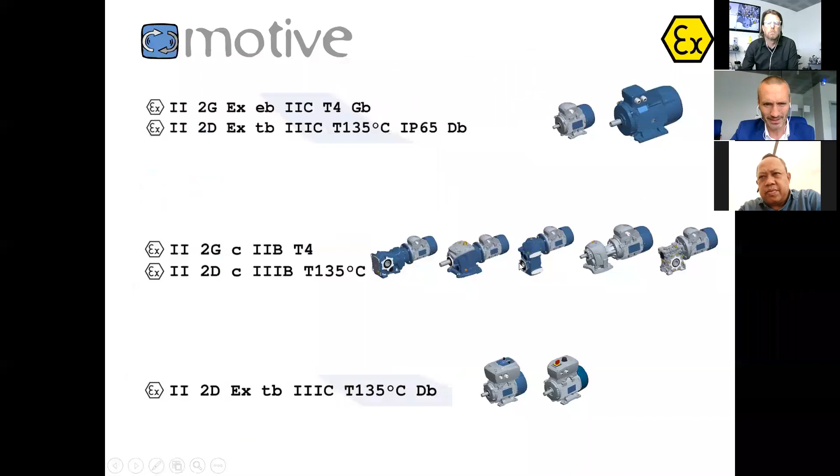Whoever it is, I'm going to ask him to, my God, deactivate. Did I get it? Yes, I got the right one. Okay.

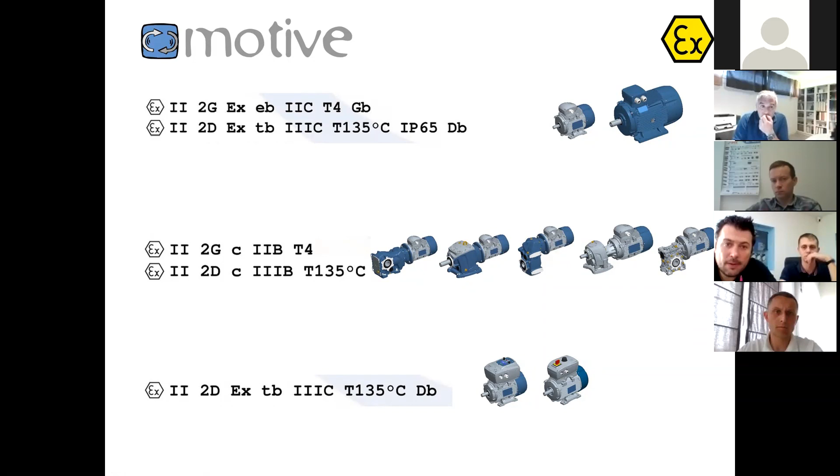These nomenclatures are what we are going to understand. If you understand this, you understand how to order. You also understand what is the right thing to be installed in a place and what to say to your clients. And we are going to use the main example, the motors.

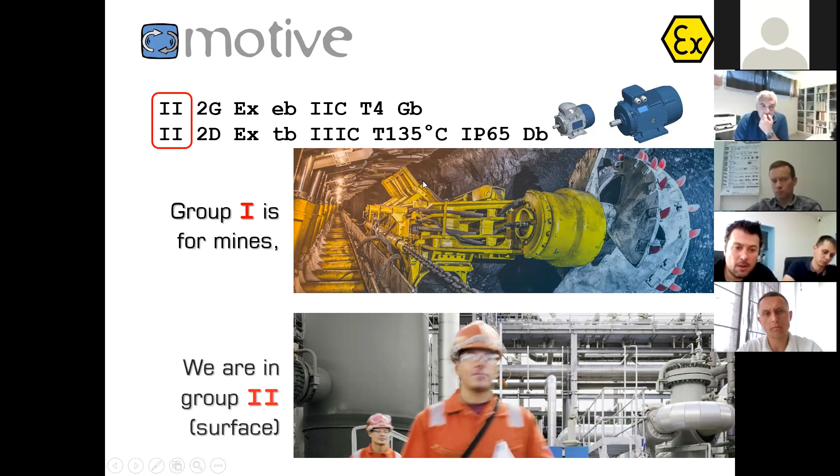Now you can see that at the beginning of what you find in the nameplate or in the certification, you find this II. There may be only one I or two I. The difference is that II is for surface industry. I is for underground, so typically the mines. But if it is a mine in surface, it's II, okay? The two things, I and II, take two different kinds of classifications of the risk.

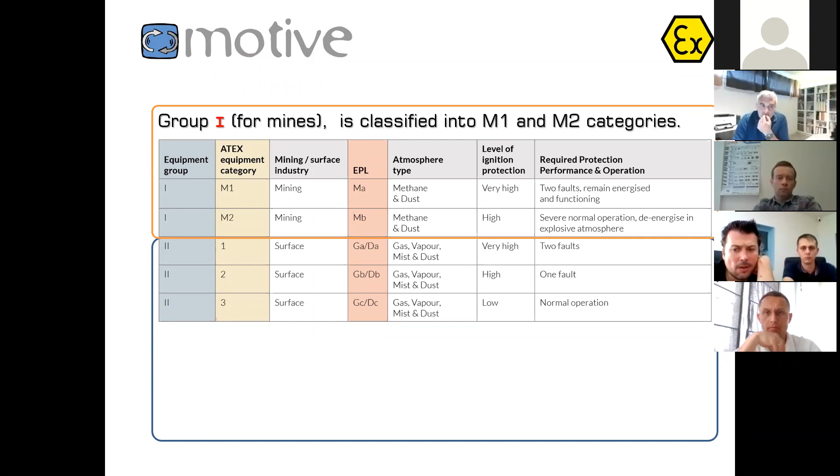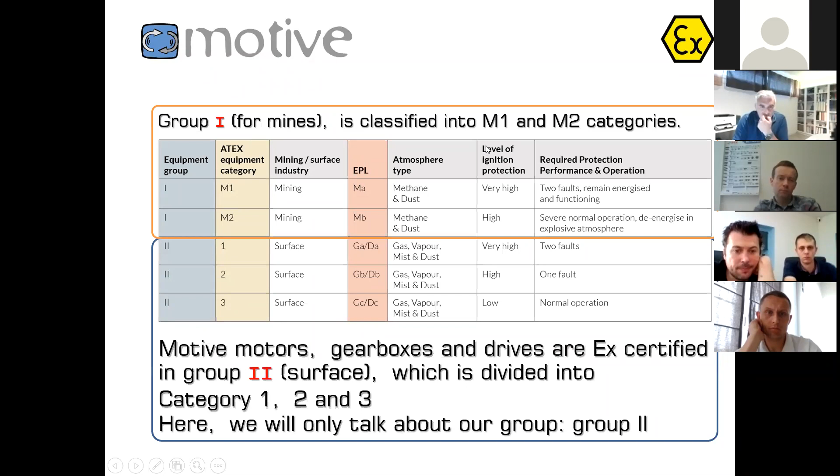Different categories, okay? Now we are only in II, which is 90% of the market, and we are going to talk only about the categories of II, which are category 1, 2, and 3. By examples, I will show you what it means. And in fact, here we write another number, 2, which means category 2. There are 3 categories. 3 is low risk, 2 is high risk, 1 is very high risk. And I'm going to tell you by example what it means.

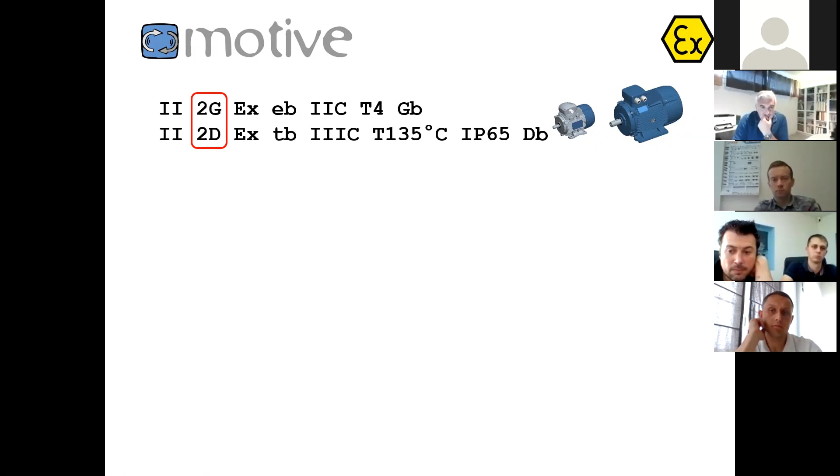Then there are 2 letters, G and D. G is for gas, and D is for dust.

Come on, PowerPoint, go on. Okay.

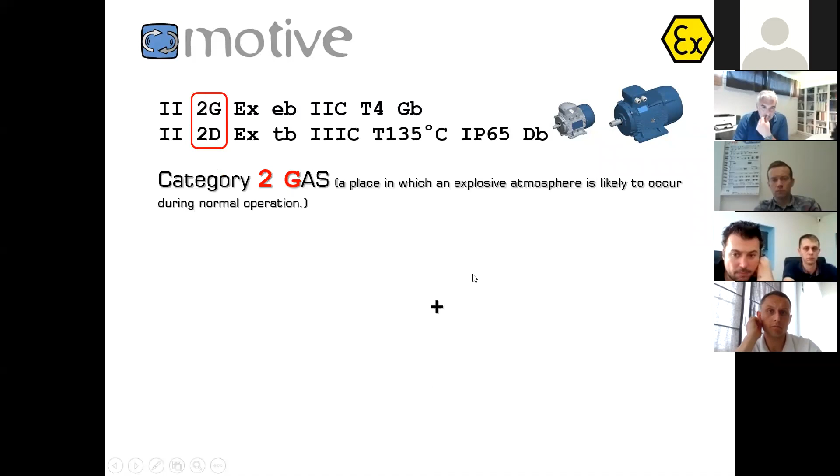Some people like to talk about zones, okay? They don't tell you category and dust or gas. They tell you zone. But zone is not written in the nameplate, it's not written in the certification. There is a client, Jordi knows this very well, he's listening to us, who wants the zones to be written in the nameplate. But we can write in the nameplate only the nameplate data that the certification body asked us to put. Okay, also the nameplate has been certified and we cannot play with it.

So for this client of Jordi, we had to add a further nameplate. But by the way, this further nameplate is useless because if we say 2 gas, we are talking about zone 1 and 2. If we say 2 dust, we're talking about zone 21 and zone 22. Why 1 and 2? Because category 1 is the highest risk. Category 2 is high risk too, but a little bit lower. And category 3 is low risk.

Now, zone 2 is category 3 gas. Zone 1 is category 2 gas. Zone 0, we don't have it, is category 1 gas. Okay, at Motive, we don't have category 1. But we'll see that this is useless because no one would put a motor in a category 1 place. 21 means category 2 dust. Zone 22 means category 3 dust.

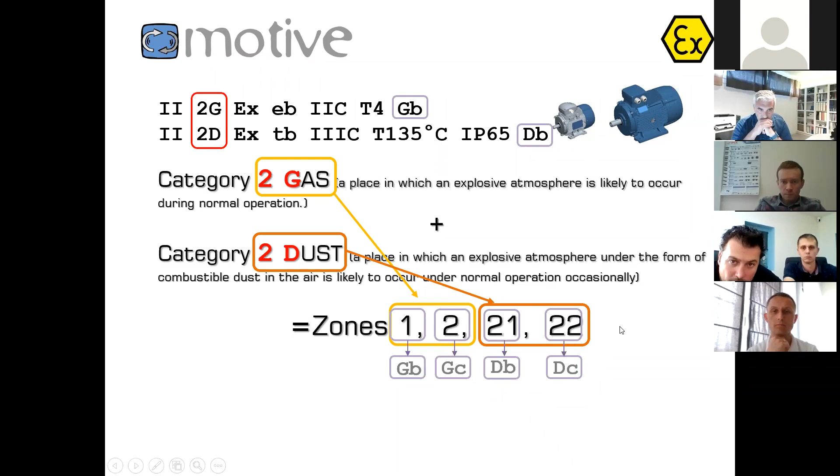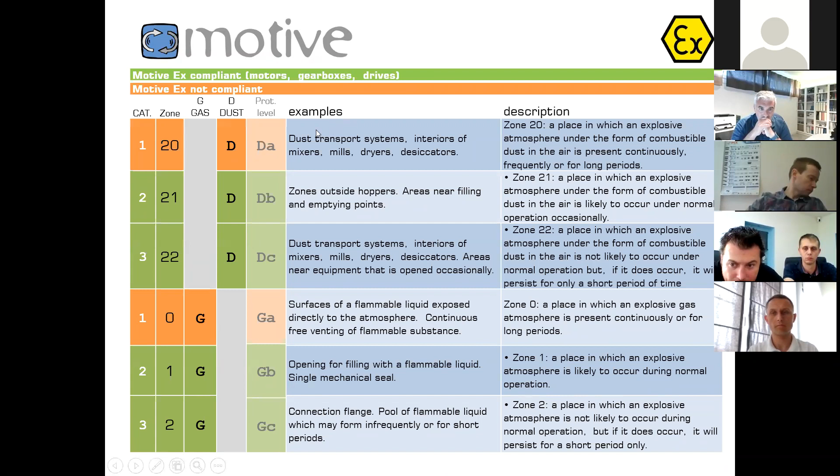I'm not going to bore you further or confuse you further, but this table chart is summarizing what I just told you. Okay, so if you want to go back, you will read it in the slides that I'm going to give you after the webinar. These are also examples of what is category 1 or 2 or 3, but the best examples are given by these pictures. Now, you can see zone 0 is category 1, zone 1 is category 2, zone 2 is category 3. Zone 2 is where they tell you, please don't smoke around your car, okay?

Maybe you did it, and luckily nothing exploded. The fact is that the risk is there, but it's not high. Category 2 is where the gas passes through the pump, but it doesn't remain there forever. Zone 0 or category 1 is where the fuel remains. Would you put a motor inside the fuel? No. Okay, that is why I told you that we are covering everything, because we couldn't make a motor for category 1, for zone 0. No one would put a motor inside the fuel.

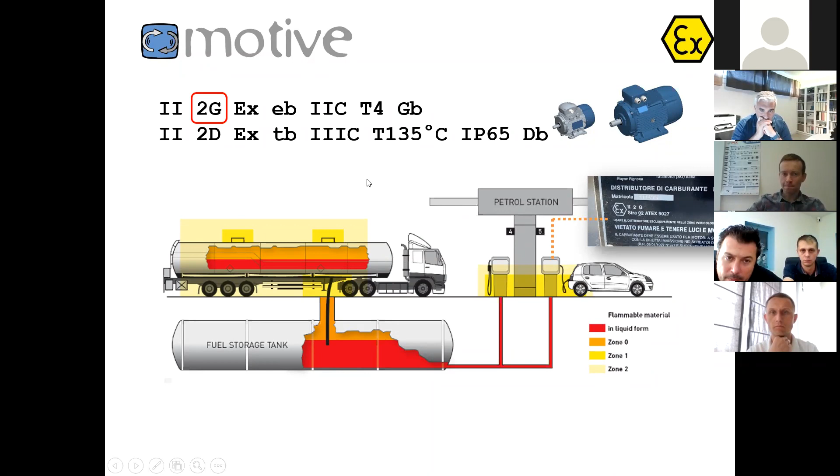So the tank is zone 0, the pump is zone 1 or category 2. And in fact, if you look at the pump in the gas station, you will see that it's category 2 gas. Okay, this is a photo I took myself. Dust, it's the same matter. Inside the silos, inside the tank, where the dust remains is zone 20 or category 1. Where the dust passes through is zone 21, which is category 2. All around where the worker is working is category 3, like zone 22.

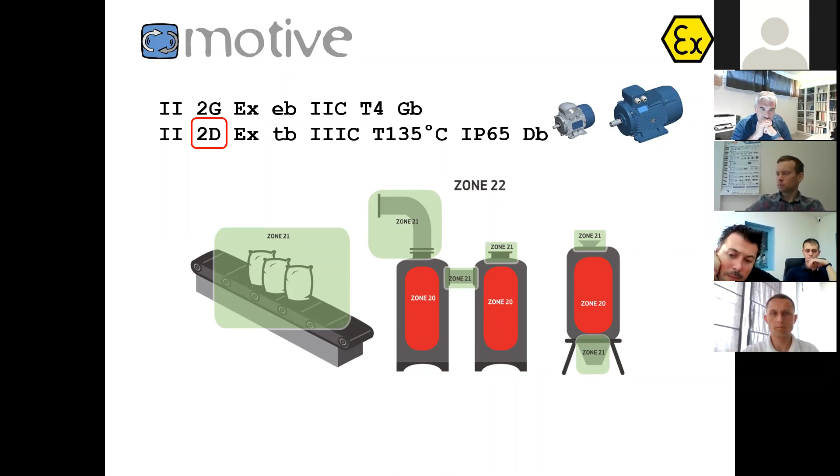You can understand by this how different category 3 is from category 2. In fact, with category 3, the certification is not mandatory. A manufacturer of a motor or a gearbox can declare that its gearbox is suitable for category 3 under its own responsibility. And that is because the risk is low. And the features of the product are very different too.

Now let's skip the letters Eb, Tb, etc. We'll come back to them later because this is leading to some confusion, but I'll anticipate it. Eb, Tb, they are not classifying any risk. They just describe the product, the solution taken by the manufacturer to handle that risk, that gas, that dust. That's all.

Okay, now we see II or III. That is always written, never changes. Okay, they could also avoid it. I don't know why they wrote it down, but what matters is C. There are 3 groups of gases and 3 groups of dust. A, B, C. IIC is covering also B and A because C is the most risky. If you are able to manage the highest risk, you are considered in compliance also with the lowest one.

So we never ask you as Motive, what group of gas is it for? What group of dust is it for? Because we are covering them all. So this is not a question that you need to ask the client: classify his gas or his dust according to its physical properties.

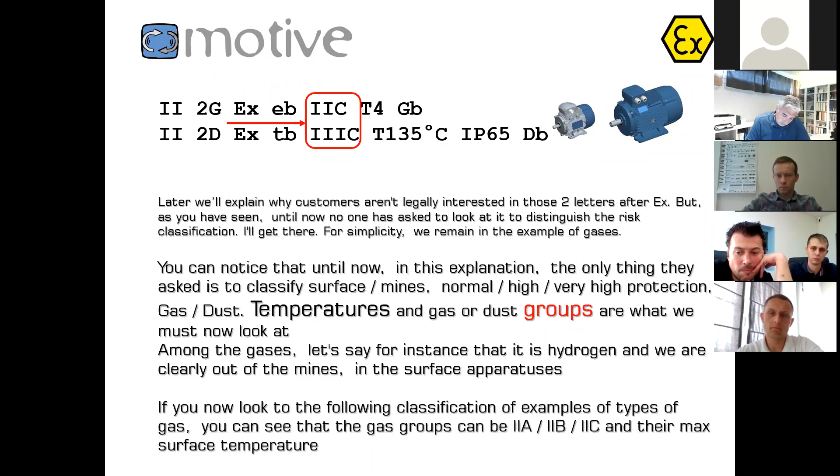Let's make an example, okay? There is also another thing which is written, T4. It's the temperature, okay? It's the ignition temperature of the gas or the dust. At what temperature does this gas get inflamed, explode, or create a fire? If it is T4, it means 135 degrees.

Actually, I tried to look for a gas which has an ignition point which is so low, 135 degrees. I didn't find it. Somewhere there should be, because as I told you, physicists are not sadistic. If they did it, they have to find such kind of gas. Of course, if our product is that cold, 135 degrees, it means that it complies also with the gases T3, T2, T1, which have an ignition point which is 200, 300, 450. Okay, we are colder. We don't reach that temperature, therefore we comply with them.

Here we are already facing one kind of typical confusion of the client. Sometimes they read a nameplate and they say, I want it T3, and we offer T4. And they answer, no, I want T3, it's written T3, I want T3. It's T4. Yes, but I said T3, it's T4. Okay, because they don't know what you're talking about. It's like they say, I want IP54 because it's written IP54. Okay, I give you IP55. I said IP54. Okay, this is a matter of ignorance.

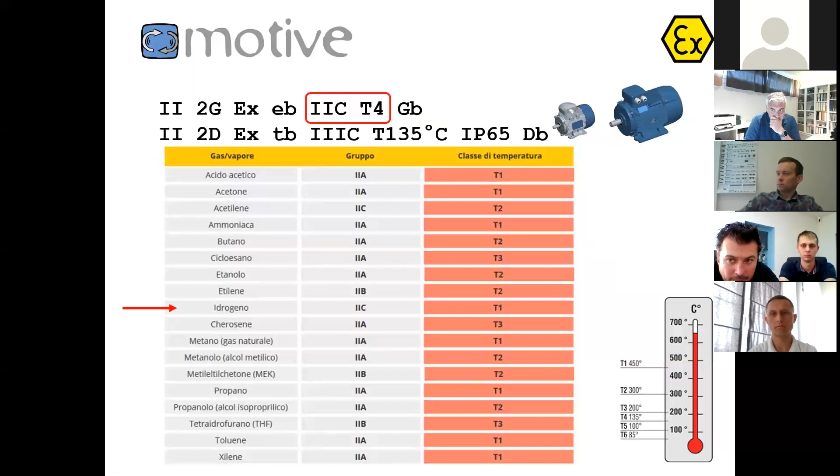Hydrogen is a C group, which means the highest risk. These are physical properties, okay? We are C, and therefore we comply with C, we comply with B, we comply with A. D does not exist, okay? Our product could not be used only with those gases that are T5 or T6, okay? So we are there.

Then the dusts, also the dusts are classified, as I told you, A, B, C. D does not exist. The most risky dusts are the conductive dusts. Actually, they may make some tests to classify the dust. They put a certain temperature to find out the ignition point, and they see whether this dust makes only smoke or quickly gets all inflamed, or what happens. Okay, these are physical properties.

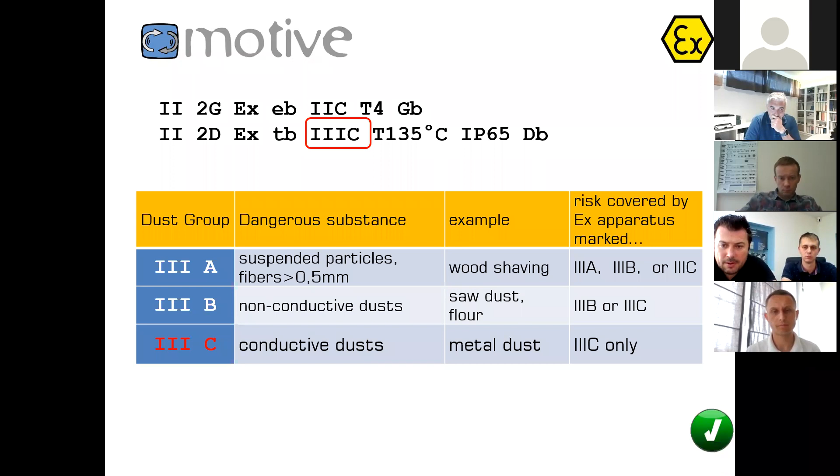But what is important for you to know is that if that gas is B, you cannot use an A product. If that gas is C, you can only use a C product, okay? We are C, and therefore we comply with them all.

And when a client sees a product which is light, almost looking like a normal one, can you give me that ATEX product there, Matthias? Yes. Even Matthias made some confusion. He asked me, "Is it this?" Because it's looking like a normal one. Okay, you can see it.

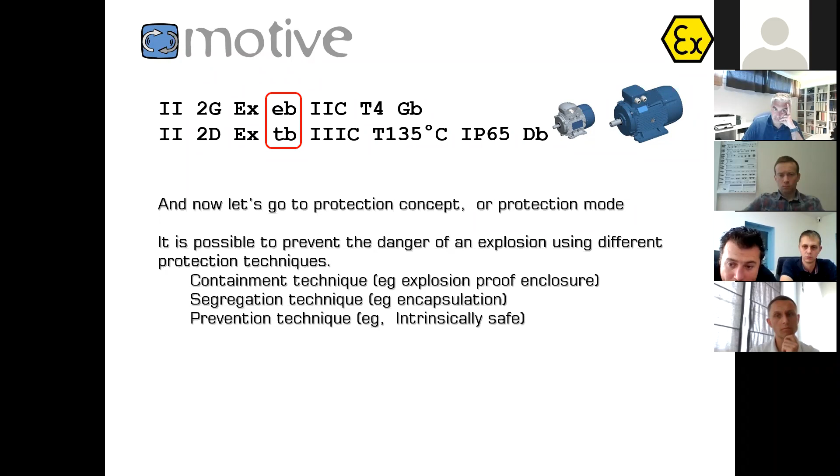Okay, and in fact, here you can see what the norms say. We are in increased safety, and it is for category 2 risk. EXD is also for category 2. There is not a place, not a gas where an EXD can be installed but an EXE could not. Okay? It does not exist by the norm.

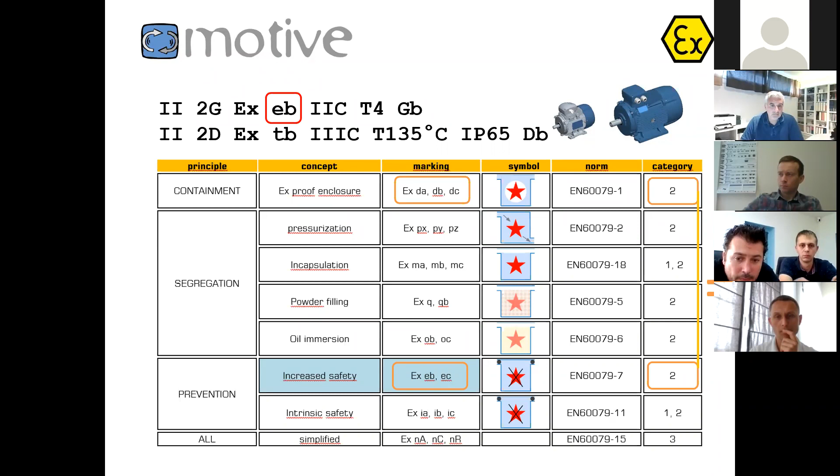EXD is based on an enclosure which must resist internal explosion pressure with certain features. And that was our old way. And the new way is EXE. We must avoid any spark or any heating from inside and outside, of course, too. Sometimes you can see also EXDE. What does it mean? It's that in that product they combined some parts which are containing the explosion with some parts which are preventing the explosion.

Matthias, you can always speak. Yeah, let me just give you one further input on what Giorgio was just telling about the two ways of achieving the same objective. From a commercial standpoint, what has always been said is, okay, a motor like this in EXD, heavy, ugly, whatever, must be expensive. And it is, actually, it is expensive. It is normally 2 up to 7 times more expensive than a standard motor.

Motive has decided to go just another way and say, okay, let's talk about the EXE, which is much more efficient, both from the aesthetic standpoint, but also and mainly from an economic standpoint. In fact, if you check what we are offering to our customers and the market, we are offering a price which is 40% higher than a standard motor. So if you compare 2 times, 7 times the price of a standard motor and 40% on an ATEX motor compared to standard, you will see why Motive is so successful on the ATEX market at the moment. Okay, so keep this in mind when it comes to discussion with your customers.

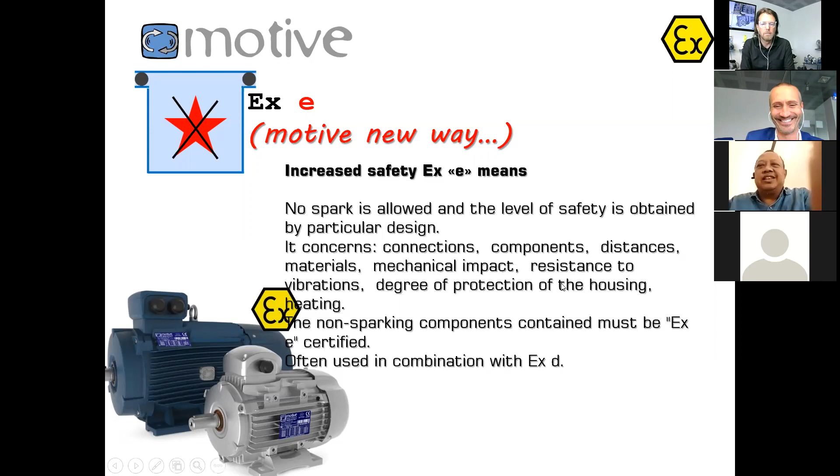Thank you. Yeah, actually, some of you who know Motive better just got bad news. He said 40%. For those who do not know Motive, 40% compared to double or 7 times the price was very good news. But for some others, it was bad news because once it was only 30% higher than the standard motor. You know, it's also your fault. The fault of some clients who said, how is it possible that it's so cheap? So, okay. Anyway.

Okay, there are also some other techniques for dust. And the one that we have adopted is dust proof. Of course, we have to take care also about the surface of the product. Dust proof means the dust cannot go in, but anyway, we have to take care about anti-static charges. So plastic materials cannot be there, or if they are there, they should be treated with conductive materials. Some components, like cable glands, must be previously ATEX certified. The painting layer should be made in a certain way, still the chemical composition, because we also have to take care about the surface.

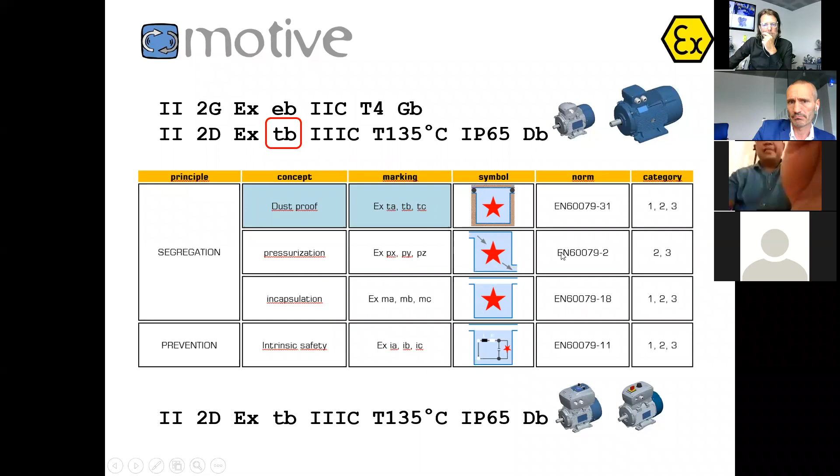And these are. If you want to know more about what are the main differences between our standard product and our ATEX product, you can go to the website of Motive, to the manuals section, and download the ATEX addendums. They're called addendums because they are like additions, completion of the main manual of a standard product. In these addendums, you can find some pictures describing the main differences, but they are not all. There are many further differences. And there you can have an idea.

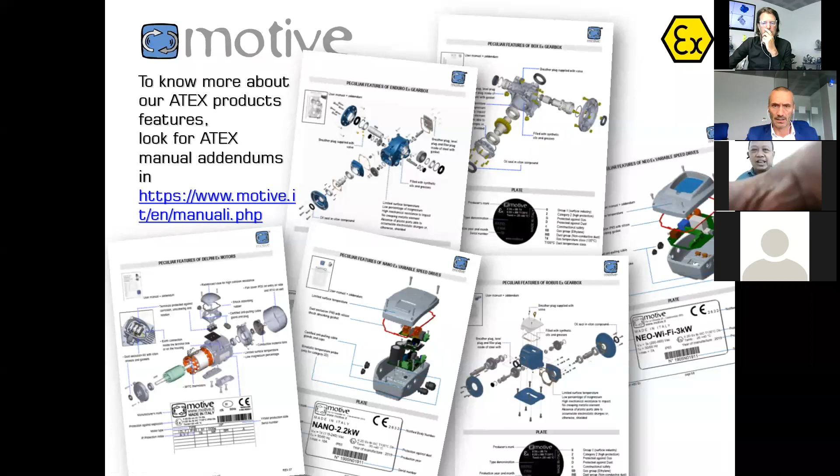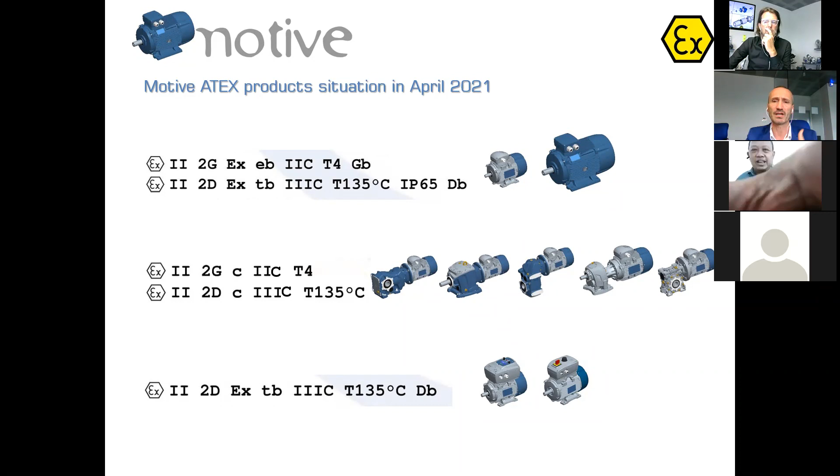Actually, we told you at the beginning that we had certifications for the motors, for the gearboxes, and for the drives. I hope that now you understand what II, 2G, 2D, Group C, temperature mean. And I hope that you understood also that the two letters after the Ex, they are not risk assessments. They are just ways to describe the techniques which have been adopted by the manufacturer.

Now, actually, when you put together, when you mix a product having a certain classification, risk assessment, with another, the whole safety is determined by the one offering the lowest. So if, for instance, like in the past, we had a certification for the gearboxes which was for the B group, then by mixing motors and gearboxes, we could not reach the C group of a motor anymore. Okay? So this is new.

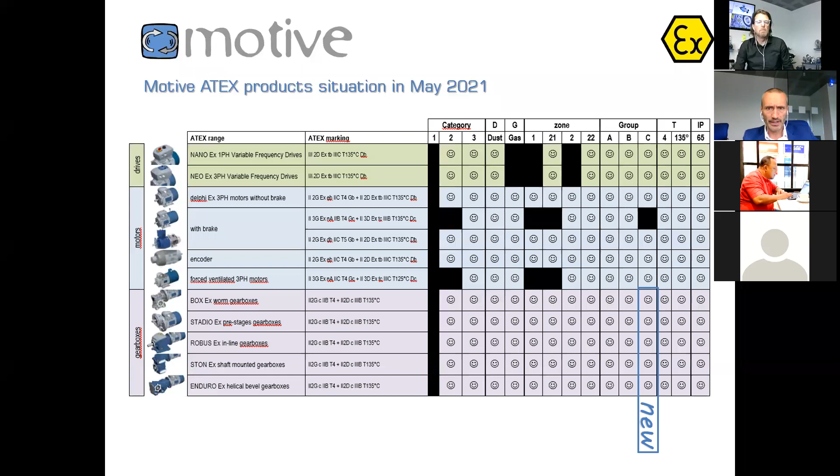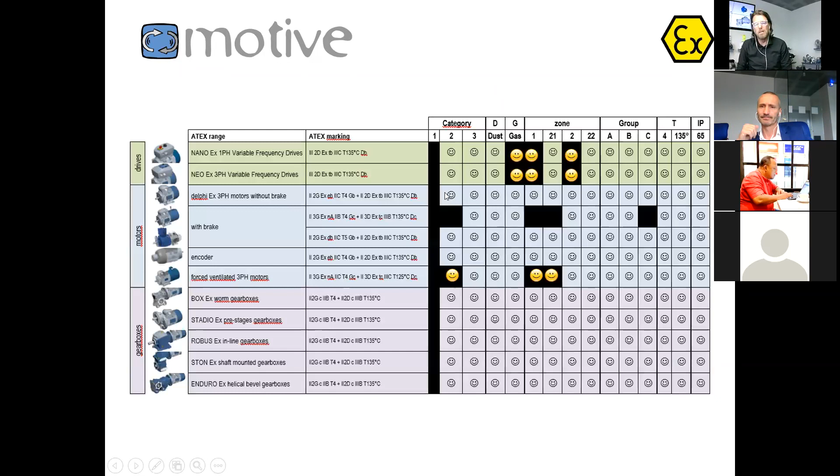If we put a variable speed drive of Motive onto a Motive ATEX motor, we do not fulfill anymore the gas requirements, therefore zone 1 and zone 2. Now there is also a further point that we are trying to... May I just go to the previous slide of Giorgio, which is, I think, one of the most important, interesting charts that we can show you.

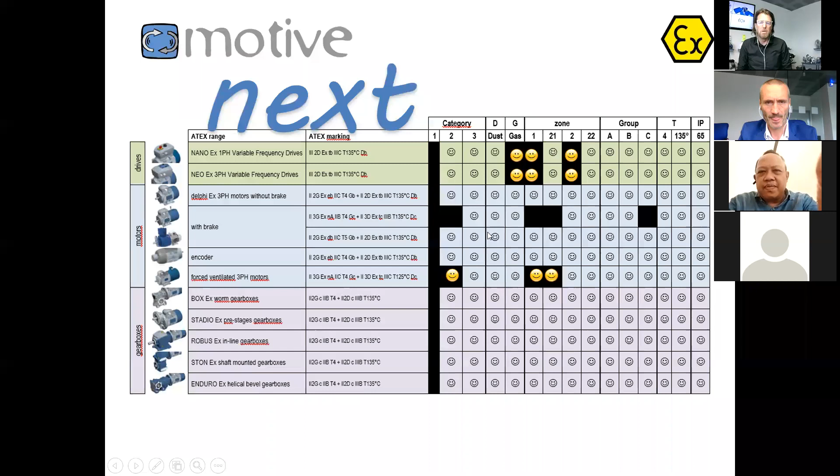Let me just say that when you start using our configurator, okay, some of you are already using it. We have a lot of downloads, up to 150 downloads of datasheets from our configurator every day. So it's a very powerful tool. When you start using it, the configurator will guide you through exactly this situation. It will automatically select the ATEX option that is feasible or non-feasible.

Okay, so if you are in doubt on a specific gear motor inverter application which is to be ATEX, I strongly recommend to use our configurator. Giorgio is now showing you how it works. So we take a gearbox. We are selecting any kind of gearbox. In this case, it's a helical gearbox. We make a selection of the motor that is combined to the gearbox, and step by step, the system is guiding you through the right selection and is also offering the option of ATEX.

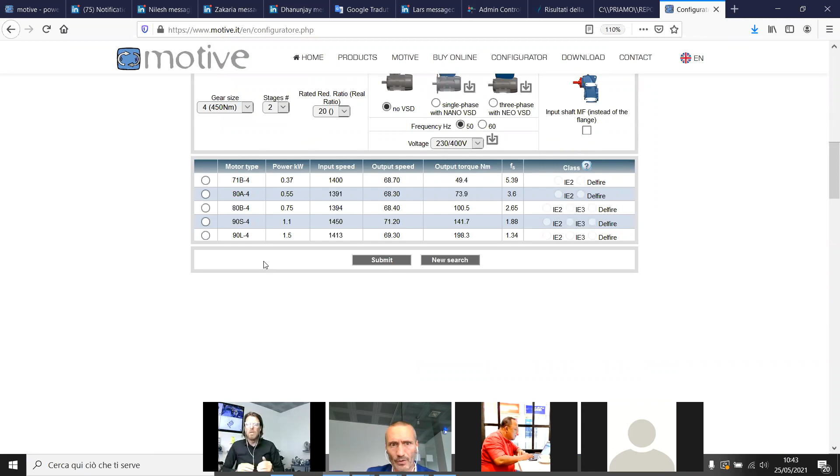As you can see in this case, there's one option for the ATEX category 2 in 40 degrees ambient temperature. For instance, if we now change this into an IE3 motor option, as Giorgio is doing right now, excellent, what you will discover all of a sudden by submitting and refreshing this data is that the ATEX option can also achieve the 50 degrees ambient temperature. Only if there is only the motor, not the gearbox. Exactly, only for using the motor in this case.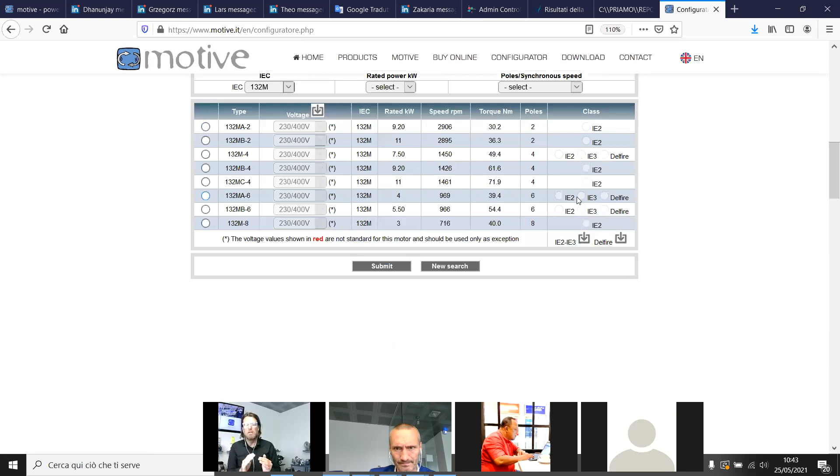But what I'm trying to transmit to you is if you are in doubt on a specific selection of a combination of ATEX gear motor inverter, use the configurator as much as you can. You see, in this case, all of a sudden we have an additional line that is showing you the option of the 50 degrees ambient temperature. So play with it as much as you can. If you are in doubt, in any case, you can drop us an email and we can support.

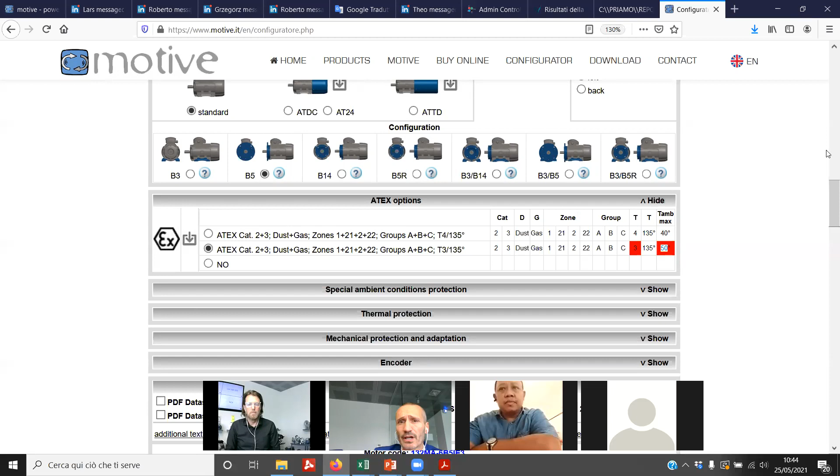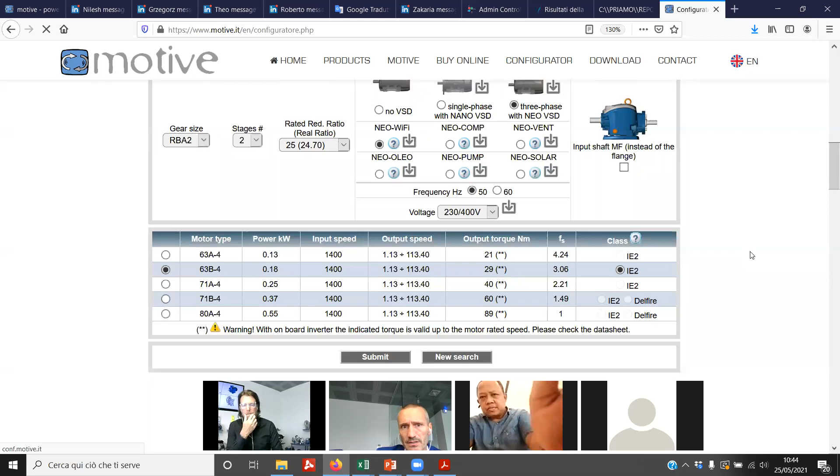Yeah, correct. Actually, you can also mix here variable speed drives with gearboxes, and you can find accessories like encoders. And according to the selections that you do, it changes the offered options. Also, brake motors are another example. Let's put a variable speed drive. This is a further example: it took off the gas. If I put a brake motor, it will give me several options, but in this case, since I put a variable speed drive, it took away the gas.

Maybe most of you know how our configurator works. Here you can download data sheets, three-dimensional and bidimensional data sheets, CAD drawings, STEP models, etc. And this is like an online consultant. You don't need any login. So to those who didn't yet use it, we just say play and learn, like we normally say to children. And let's go back to our slides.

We said that the configurator is following our development, and therefore behind this configurator there are also these data. For instance, since last week we got the new certification where gearbox is adding the C group. We updated that, and you saw that now it's also offering C group in the gear motors. And in the future, you will find some further updating of the configurator in our catalogs, of course, and those who receive our newsletters will receive an email informing about it.

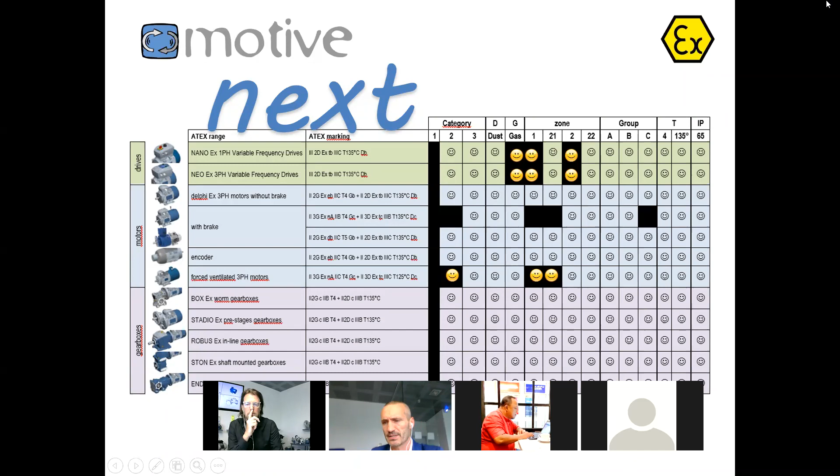We are making power coolings because our motors are certified ATEX also for converter use. And in fact, you find it written now in the nameplate. Let's see if I can show it. Here it's written for converter use operation, because they're also suitable for converter use. But then comes a problem. If I decrease the speed, I need a power cooling. But if I want it to be in an ATEX ambient, this power cooling shall be ATEX too.

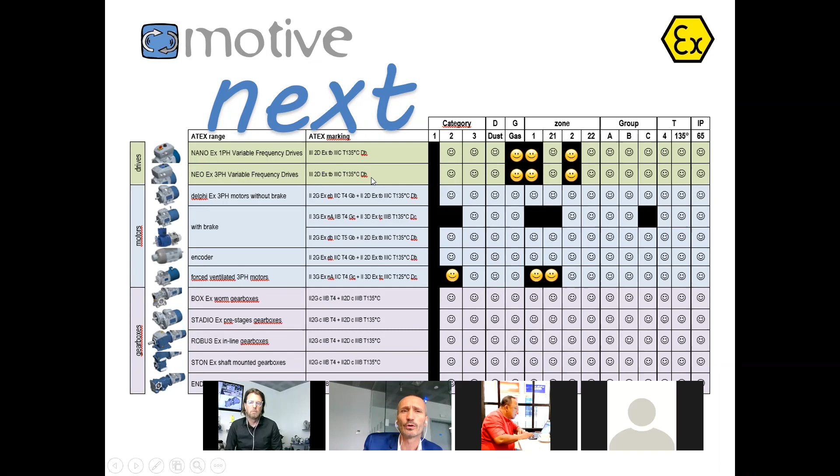And we only have power coolings for category 3 now, but we are working on the development of new power coolings. We are also working on a new Nano and a new Neo, our variable speed drives for ATEX gas. Actually, you can imagine how this can help your sales too, because if one wants an inverter, a variable speed drive in an ATEX atmosphere, normally he is going to buy an ATEX cabinet with ATEX cable, and it's a huge expense. While if you can have an ATEX motor inverter, then you have solved everything. Now this ATEX motor inverter is there only for dust, but we expect that before the end of the year we may have new versions of Neo and Nano, and then we will certify also for gas.

In the offshore and in the shipping industry, there is also a combination which may help the business of our Greek followers today. Now, you know that we have two kinds of certifications for the marine motors. One is free, which is called the type approval, what you see here. It's covering all our three-phase motors. So if you can combine this marine motors approval, RINA is a member of IACS, which is an international accreditation of all the global marine certification bodies. Okay, so its norms, its rules are the same as Lloyd's or Det Norske Veritas or certification bodies in Asia and in America. Now you combine this with the ATEX and you find an exclusive product to be offered to your clients.

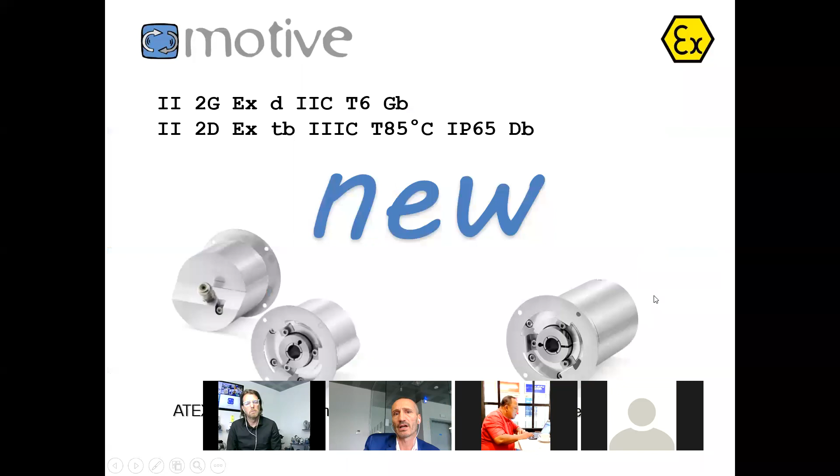New is we have ATEX encoders. We have an ATEX brake, which is an Ex d. With the brake, since there are some friction points, we had to consider that we couldn't prevent the sparks or the heating, but we could prevent the explosion from going out. So these brakes are also 2 gas and 2 dust, which means zone 1, 2, 21, 22, like the motors. But they are very expensive.

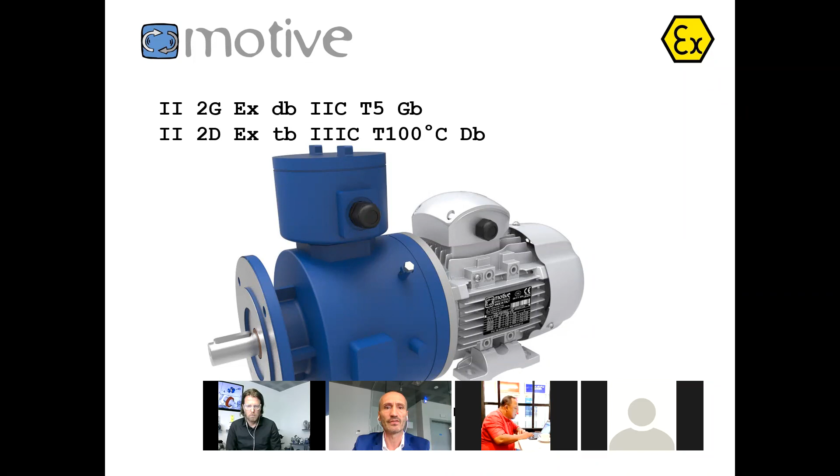So if you are only in category 3, we have a further version of our brake motors looking like any kind of brake motor, but with specific features, of course, with a normal brake which is attached onto the motor shaft. And that is for category 3. In that case, the ATEX version is only 30% more expensive than the standard version, okay? But if you need category 2, then you need this special brake to be combined with the motor. These are the power coolings that we are developing for, once again, category 2, gas and dust.

Why do we insist on category 2, gas and dust? Because we don't want you to come to us and say, I need category 3 or category 2. I need dust or I need gas. I need group A or B or C. And that is also an advantage for the distributors. We have some distributors, Zakaria is following us, for instance, in Morocco, which made a stock of ATEX motors. You can't put ATEX motors in your inventory normally because there is one for A, one for B, one for C. The C is too expensive, the Ex d is too expensive, one is for gas, another is for dust, and therefore you never know what your client is going to buy.

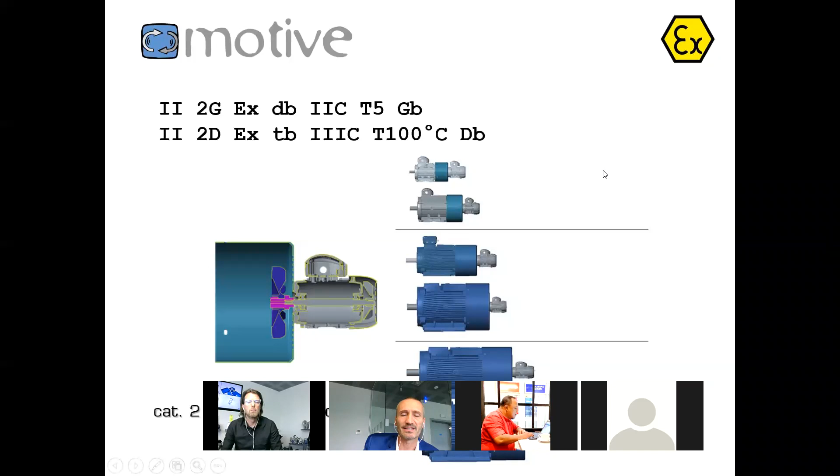But with us, with these motors, you comply with gas, dust, all the categories where a motor can be installed, all the groups. With one motor, the only place where you cannot install it is underground in mining. Not a problem normally, no? So there are clients who decided, like for standard motors, to put our ATEX motors in their inventory for a fast local service. They permit to make more money than the standard motors, where we know that the price is like that of a commodity.

We recently also got an upgrade of the certification of the motors for them to be suitable for 50 degrees. It was requested in the Middle East, 50 degrees ambient temperature.

Yeah, Matthias. I have a question for Giorgio, sorry. Some customers are asking us about temperature 55 degrees. Would this be okay if we can offer, even if it's stated 50 degrees, because there is a tolerance on that? No, there is no tolerance. No tolerance. There is no tolerance.

Even if we know that it could work at 55 degrees, we have only one certification for the whole range. So we have to consider the worst of the motors that we have in our range. Some heat more, some heat less. If there is one which is the worst of all, this is affecting the certification of all.

And anyway, once it is certified for 50 degrees, the whole range, we can only write 50 degrees in the nameplate. If we were not talking about ATEX, that was a different matter. But here we're talking about ATEX and the certification bodies, the rules don't permit us to go beyond what they certify. Okay.

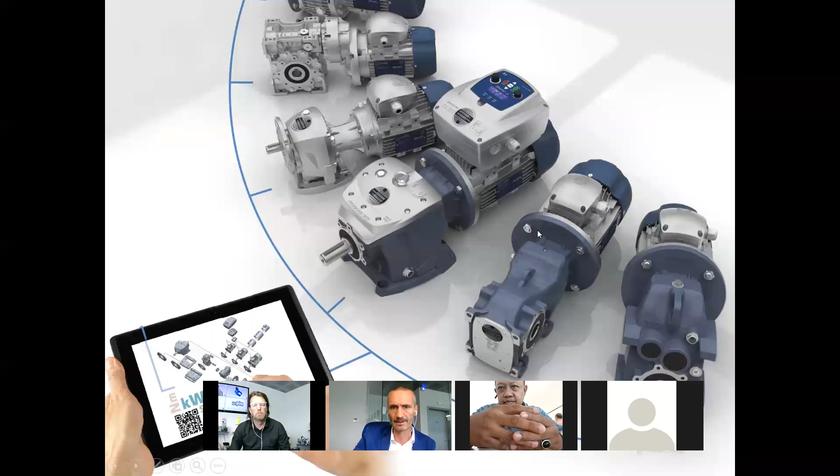In fact, you can also see it if you enter into our website the serial number of the product: you can download the list of the tests that we did, no matter if that serial number was a standard product or an ATEX one. So once again, if you need further help, there is also the configurator helping you. Play with it.

Ah, no, there is one question by Jordi. Hi, Giorgio. Why are users and buyers still asking for an EXE or EXD and not for the user classification of ATEX you explained? Which is the reason to buy this classification instead of ATEX standards? There is no reason except ignorance.

As I told you, EXE or EXD manage the same risk, just in different ways. So if you want to order a motor, you don't have to say, I want an EXD. Let's say that you really want an EXD, but it's still incomplete. What temperature? What group?

And hopefully it's for category 2. That's it. Don't just read a nameplate and say to another manufacturer, do it like that. Also because we don't like when one comes to us with an order and says, I want it according to the model code of the competitor. If you buy a BMW, do you go to the seller and say, I want it like the Skoda? They say, please choose my model.